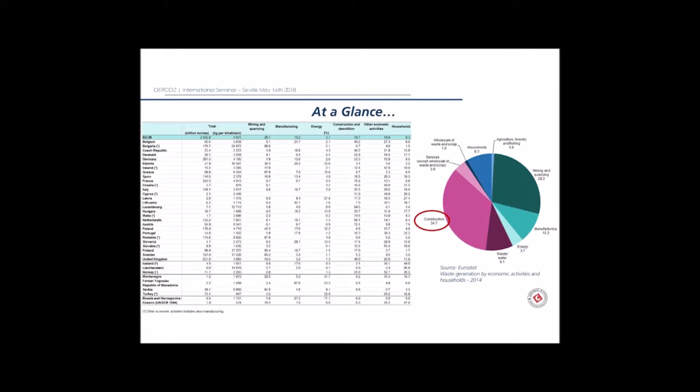And which is the answer? The answer is sustainability. But what does sustainability mean for us at lab level, at research level? In construction, sustainability starts as a strategic junction between the beginning and the end of life, in order to convert a waste into a secondary raw material. To do that, in my experience, we have to put together the knowledge triangle, and Certimac works at the base of this triangle for innovation and research, in strict contact with companies and factories.

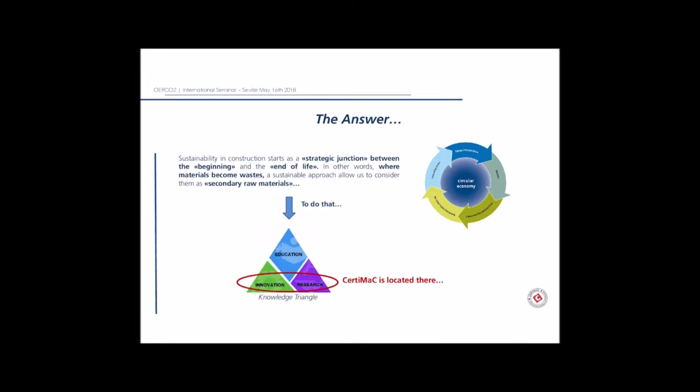So, putting this concept into practice, what does it mean? It means that waste could really be a potential answer to a need, because any kind of solid or semi-solid material originating from some productive process can potentially be integrated into a new industrial process or product, in order to produce new materials or to give a new life to the material itself.

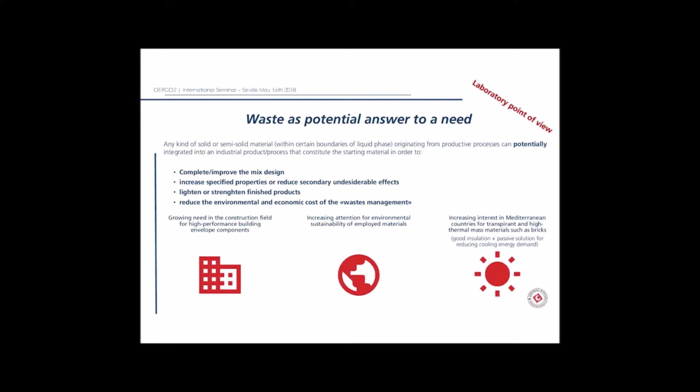For which reasons? To complete or improve the mix design, to increase specific properties, or to reduce secondary undesirable effects, to lighten or strengthen the finished products, and of course to reduce the economic and environmental cost of waste management. But it's close to impossible to define the ideal waste and to a priori define its employability in absolute terms. We need to consider 6 main elements that contribute to the overall complexity of the issue.

We need to analyze the chemical composition of the waste, the broad compositional spectrum along the productive year, the different effects of the same waste added to different formulas or mix designs, the conditions for the waste employability, the classification of the waste at European level, and of course the availability of the waste. These 6 variables are crucial to identify the feasibility and the application of the waste.

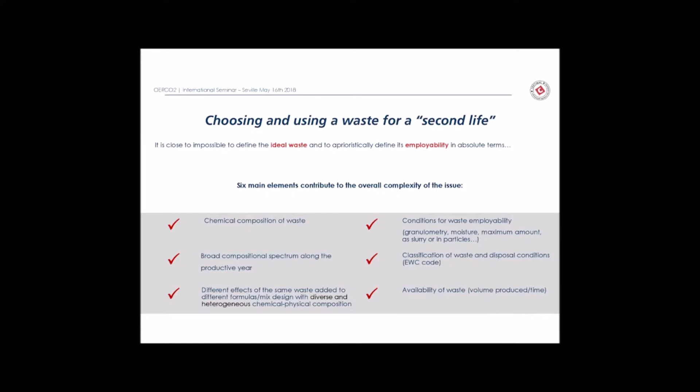So in synthesis, we want to reduce the environmental and economic cost of waste management, optimize some properties, and reduce the environmental impact. The essential requirements are availability and compatibility, and the answer at industrial and research level is industrial symbiosis. A very interesting process that could put together the need of an industry in a specific value chain to manage a waste with the interest of another supply chain, another industrial field, to catch secondary raw materials in a sustainable way.

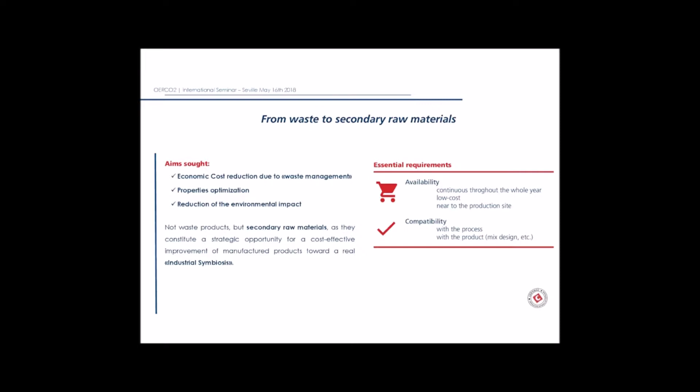I will show you now 3 different fields of application, 3 different case studies, presented, I need to premise, in a very schematic and synthetic way, not with the main aim to go deep into the technical or scientific issues, but to give you some inputs and information about the process, about the approach that we implement every day. The first one is related to innovative masonry elements.

In this application, the target was to develop lightweight cementitious masonry blocks, and we started producing them with expanded perlite and blast furnace slag. This is a byproduct of iron production, which is very interesting because it has a reactive effect as a binder, similarly to cement, and fly ashes produced by thermoelectric power plants in Italy.

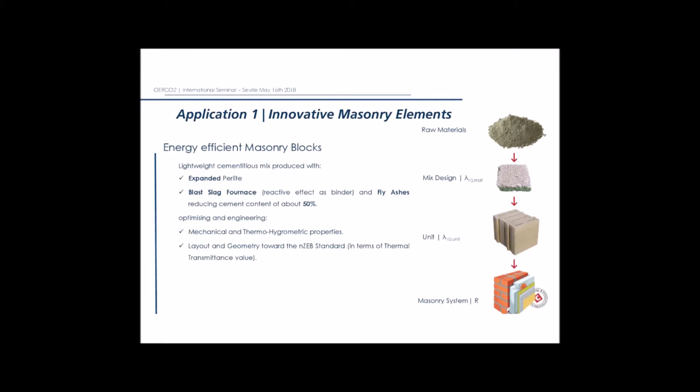And this use gives us the opportunity to reduce the cement content by about 50%. And as I'm sure you know, the cement industry is one of the heaviest in terms of energy and environmental impact on the whole construction field. And starting from that, we tried to optimize and engineer components in this manner.

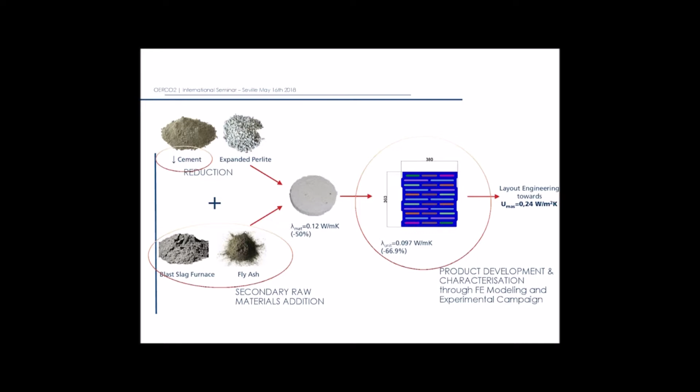First of all, as I mentioned before, we reduced the cement, we added secondary raw materials in order to develop a new admixture. After that, we engineered and developed a new block, a new masonry, through finite element modeling and an experimental campaign in order to validate a product for the market, of course, according to the European technical standards. So the manufacturer in this case will have at the end of the process a marketable product according to the European standards.

A second interesting application is related to flooring systems. In this case, we worked on an innovative way of using ceramic waste in the form of powder to obtain a uniform and monolithic appearance. This product is produced with 80% recycled ceramic in the form of powder and 20% binder. And of course, this is the final shape of the product. It's interesting because it adapts itself to any shape and dimensions.

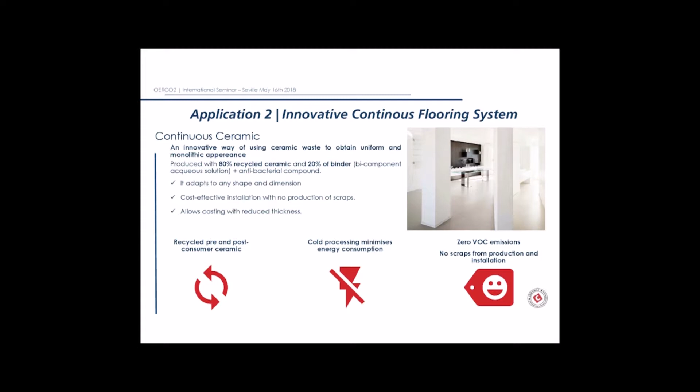It's cost effective in terms of installation and in terms of absence of any scraps, and allows casting with reduced thickness. So we have a very high content of recycled materials. We have a cold processing that minimizes the energy consumption and zero VOC emissions. This is the interesting side.

Another thing is that we made some experimental tests regarding the thermomechanical properties, and this thin layer ensures outstanding adhesion properties. Consider that a normal ceramic tile glued with a cementitious adhesive has a failure load of about 1 Newton per square millimeter, and we obtained 4.4 Newtons per square millimeter.

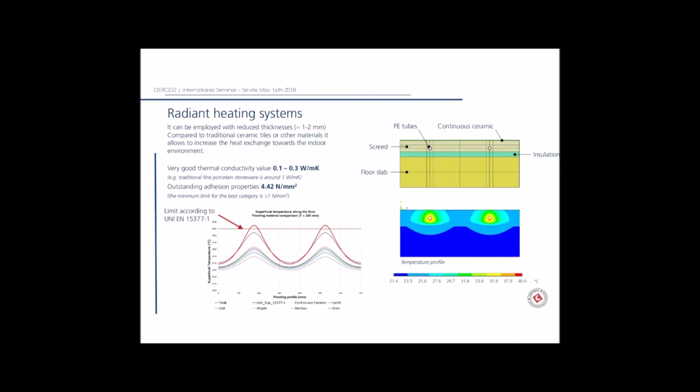And after that, we enjoyed ourselves making some modeling, some simulation about the application of this layer in a radiant heating system, and this is the difference in terms of results between the performance of the thin layer, traditional ceramics and other different kinds of typical wood.

The last one is not a single case study, but multiple case studies in the field of mortars, plasters, and screeds. This is the typology of the materials that I will show you. Also in this case, the main aim of the presentation is to share with you the approach and the methodology that we implement. And in this case, this is an innovative way to develop sustainable materials, replacing aggregates, binder and cement in 3 different steps.

The first one is an assessment of the waste in order to verify the 6 variables that I mentioned before in the presentation. The second one is a feasibility study in order to evaluate the potential applicability in a real admixture at lab level, and at the end, the experimental validation and engineering of the materials and the components, testing them according to the European technical standards. And some case studies about it.

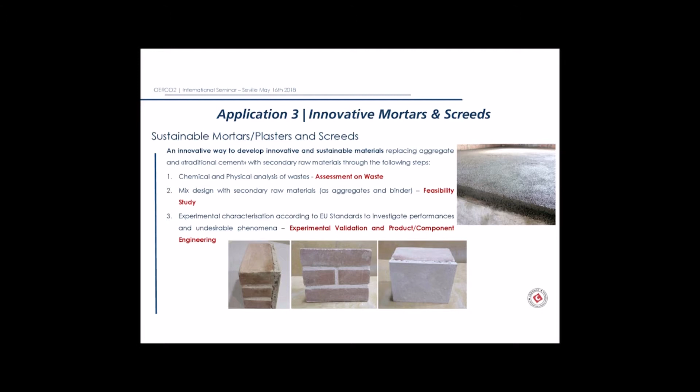The first one is a mortar or screed, depending on the performance, in which we replaced 50% by weight of the aggregates with porcelain polishing residue, considering that our laboratory is situated in the Emilia-Romagna region, in the north of Italy, and in the same region we have the largest industrial district in the world for porcelain stoneware production. So this kind of waste is very popular in our region.

Also, in our region there is a regional maritime district devoted to mussel breeding, and we use ground clamshell, thermally pre-treated, to replace the aggregates. So in this manner, we were able to substitute 100% of the aggregates and reduce the cement used in the admixture by 30% due to the pozzolanic effect of the ceramic powder. The pozzolanic effect supports the mechanical strength of the final component through a chemical process.

And at the end of the process, we obtained two different versions of the product. One aerated, lightweight, and one as it is, a traditional mortar or screed, in which the percentage of recycled materials is over 80%, and we obtained all these characteristics according to the European standards. Potentially, we are ready to go to the market, and we are collaborating with some of our customers to do that.

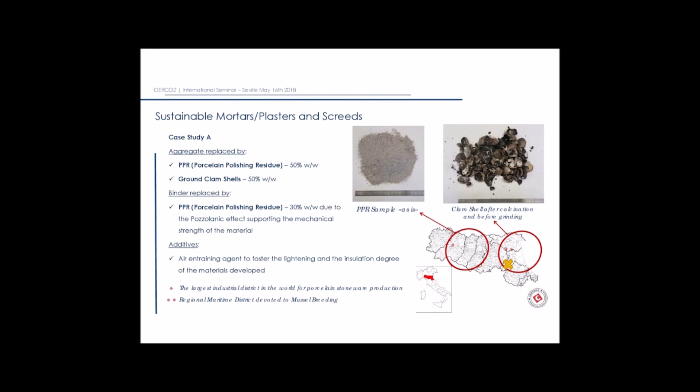An alternative to the previous one is this product, in which we have PPR, porcelain polishing residue, but instead of clamshell, ground tires in 3 different granulometries. This is a byproduct of the automotive sector, and it was very interesting in terms of mechanical performance of the mortar due to the high flexibility, the low elastic modulus of these secondary raw materials. And in this specific case, we obtained a final product with a recycled percentage above 70% and very interesting performances in terms of thermohygrometric and mechanical parameters.

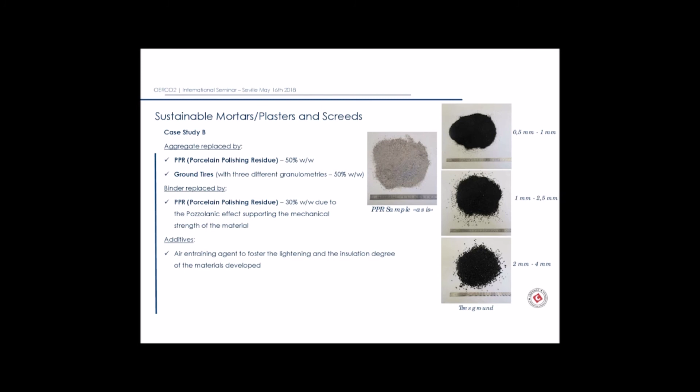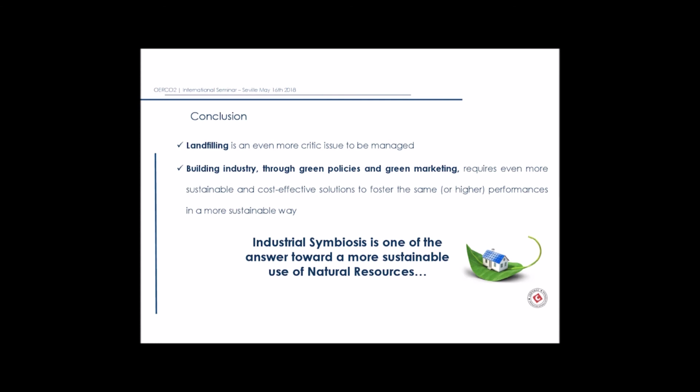And in conclusion, as you know, landfilling is a very critical issue to be managed at the moment. And the building industry on its side tries to implement green policies and green marketing, and these policies require ever more sustainable and cost-effective solutions for the market. And of course, according to our experience, industrial symbiosis is one of the answers toward a more sustainable use of natural resources.